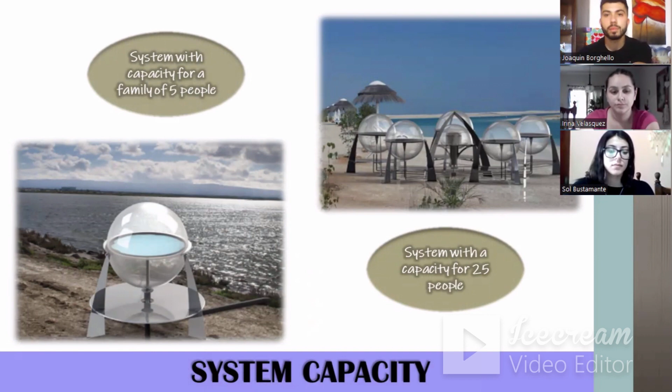In the second place, the water is stored in containers inside the regulator.

The smallest container has the fluid valve system that controls the overflow of water into the largest containers. From here, by the action of gravity and the pressure work, the water is propelled through a system of pipes towards the sphere. There, it reaches a metal tray, forming a film of water, which will evaporate.

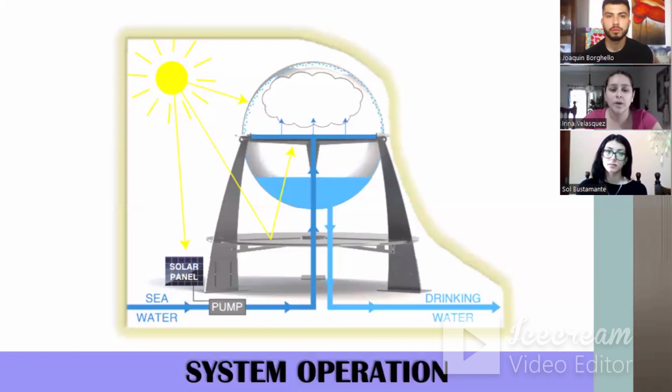Then the water in the sphere begins to evaporate due to its direct contact with the sun's rays, which increase the internal temperature of the sphere. The water vapor condenses on the inner walls of the sphere and by means of gravity, it accumulates at the bottom of the sphere. In this way, the high internal temperature, which is produced by the action of the sun reflected on a plate under the sphere, eliminates germs and bacteria from the stored water. Finally, by means of a pipe and faucet, the water can be withdrawn directly for consumption.

I will present the HELIO system components. The system is made up of the regulator module and the sphere where the distillation takes place. Both parts are connected by means of a pipe system. Now, Joaquín and Sol are going to describe these components.

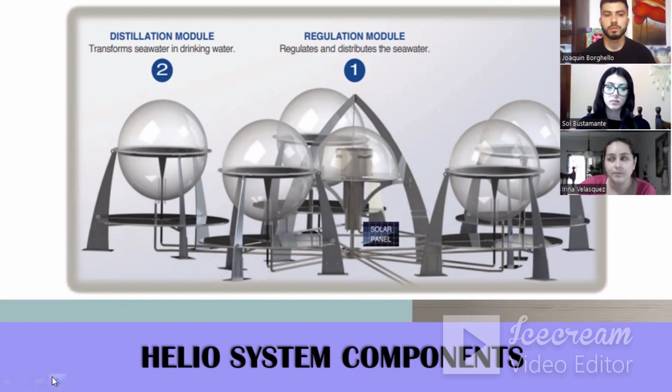The regulator module is the central part of the system, in charge of regulating and distributing the contaminated water. The semi-sphere-shaped plastic module is supported by a removable aluminum structure. Inside it, there are 2 containers of the same material. The smallest container is the one that receives the contaminated water from the pump and has the fluid valve.

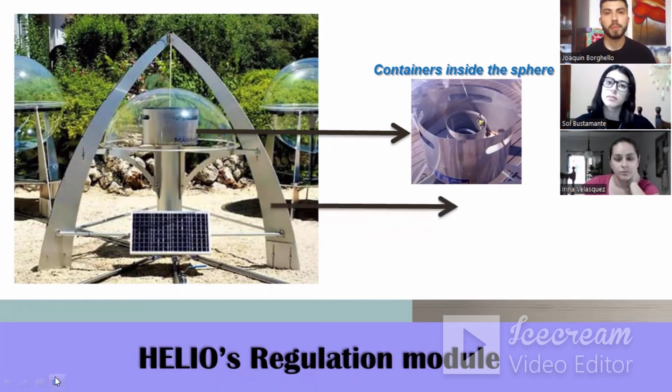And the largest container is the one that, due to overflow, is filled and distributes the contaminated water through a plastic pipe system. Finally, the aforementioned pump works with a small solar panel of about 0.25 square meters.

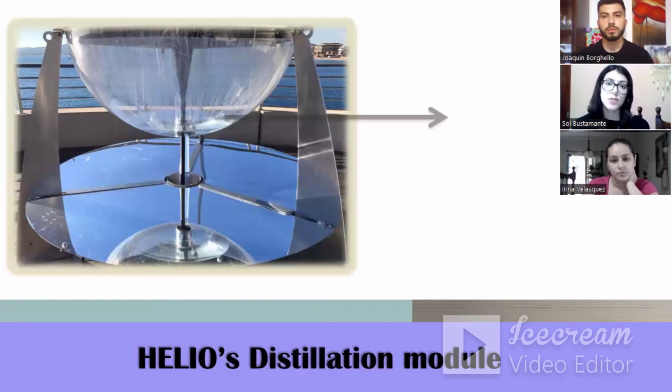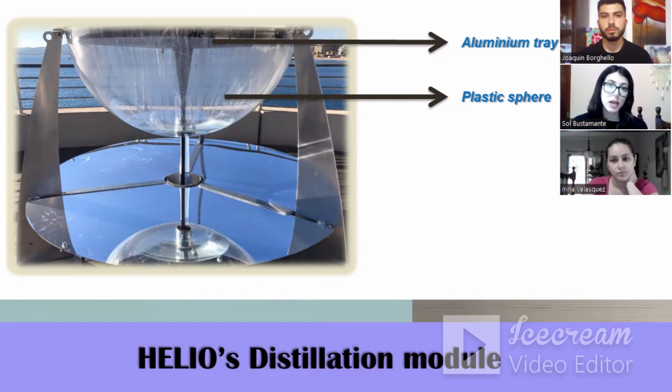The distillation spheres are plastic spheres with a surface area of 1 square meter. Inside, they contain an aluminum tray connected to a pipe that comes from the regulator module and allows the film of water to fall on the surface of the tray. Under the sphere, there is a polished stainless steel plate which is similar to a mirror that allows the reflection of sunlight and then the reverberation.

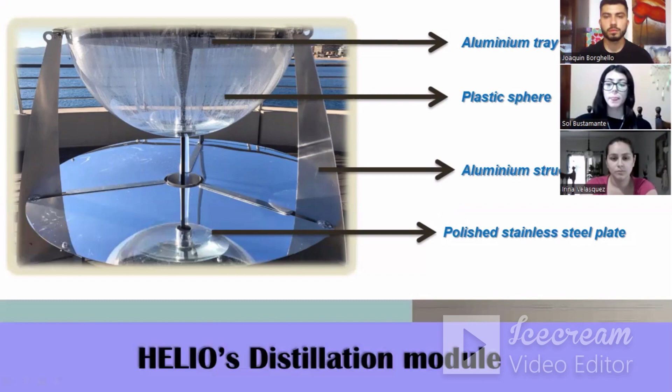Now, I will present similar water purification projects. As the scarcity of drinking water is a global problem, it is well known that there are various possibilities to reduce it. In this section, other alternatives in development will be presented. The first project is vapor condensation with a daytime radiative cooler. This project was developed by a team with a small vapor condenser based on the biological system of the darkling beetle found in the Namib Desert in southwestern Africa.

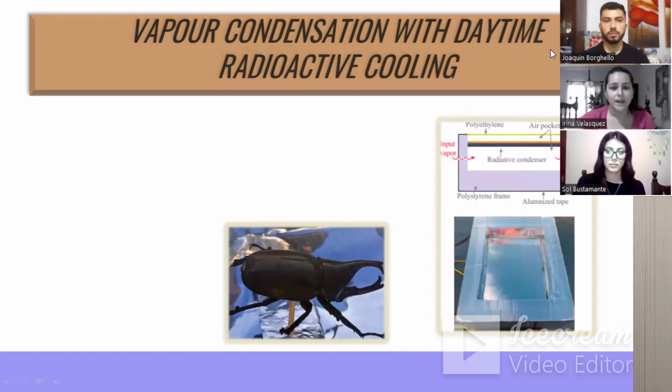Using a thin film of material called polydimethylsiloxane. This material is very efficient in releasing thermal radiation in the atmospheric transparency window and is therefore placed on silver to reflect sunlight. This combination makes the condenser cool below the dew point for condensation. The radiative condenser is thought to be in thermal contact with the cold reservoir in the upper atmosphere and outer space, with the cooling power condensing water during the day without the need for an external power supply. To clarify, the system produces its own clean water without contaminated water.

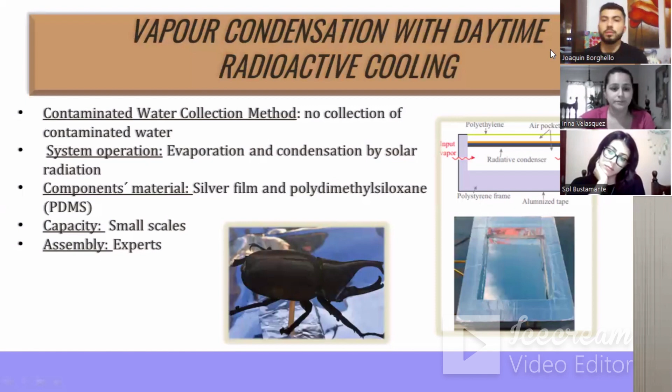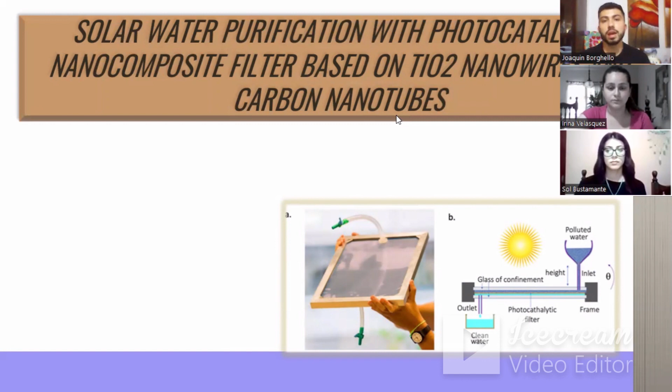The second project is about solar water purification with a photocatalytic nanocomposite filter based on titanium dioxide nanowires and carbon nanotubes. This project addresses access to clean and safe drinking water in electricity-poor regions, where advanced water purification methods are absent. In those places, it has been shown that titanium dioxide nanowire filters, assisted only with sunlight, can efficiently decontaminate the water by producing reactive oxygen species.

Also, interweaving this filter with carbon nanotubes offers an additional water decontamination channel, which is pasteurization. These filters can intercept various types of microbial pathogens, including bacteria and large viruses. So it also contributes to an efficient removal of a lot of organic compounds and infected microbes. The device has a very simple configuration.

The contaminated water is stored in a tank, then passes through a multi-layered filter material, and the pathogens are trapped on the filter surface, while the UV component of the sunlight produces reactive oxygen species, and thus provides decontamination. And finally, the carbon nanotubes absorb a broad range of the solar radiation, which heats up the filter material and thus provides pasteurization.

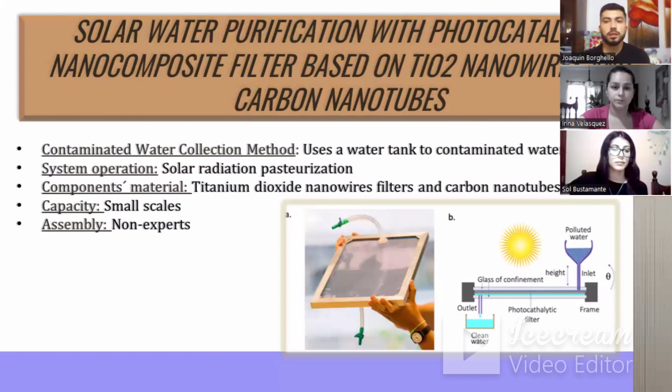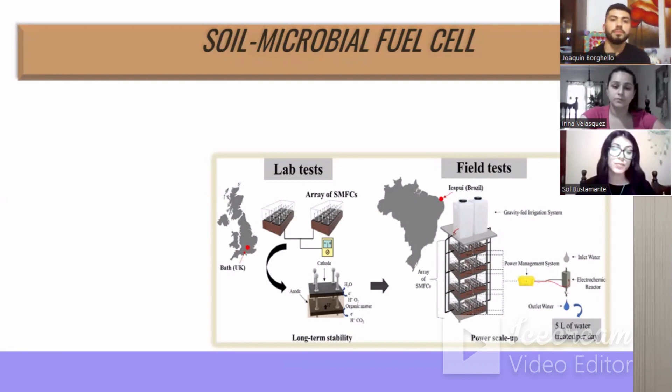The third project is soil microbial fuel cells. The soil is naturally rich in microorganisms, and this allows it to harvest its own energy, which is why some microorganisms have the ability to transfer electrons through their cell membranes to conductive materials, such as electrodes, which results in the generation of electricity.

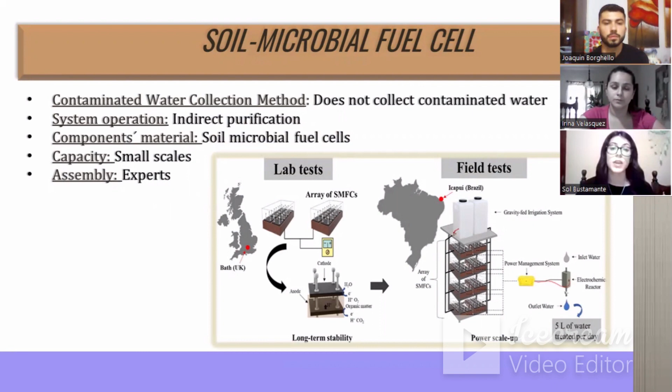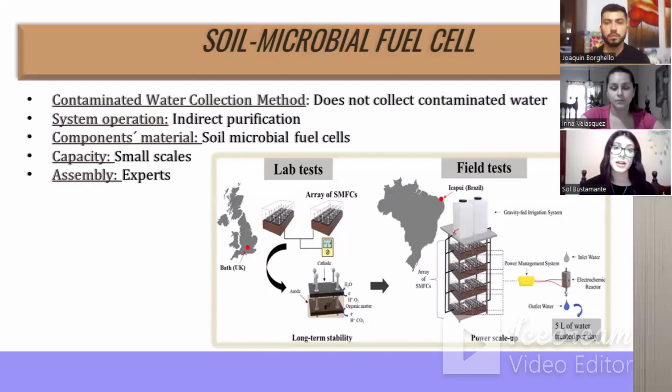The microbes that emit electrons, known as exoelectrogens, consume the organic compounds to generate charged particles. These electrons are transferred to the anode and travel to the cathode via the external circuit, producing electricity.

Now, I will present the comparison of the different systems proposed in order to demonstrate the advantage of the HELIO system in terms of water collection, system operation, component material, capacity, and assembly. It will be compared with the different projects previously presented. We do this through a comparative table.

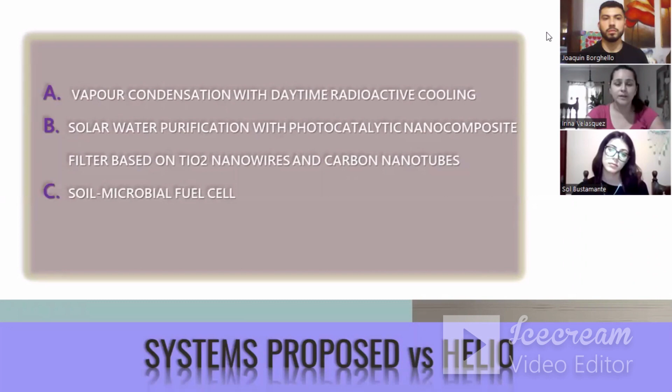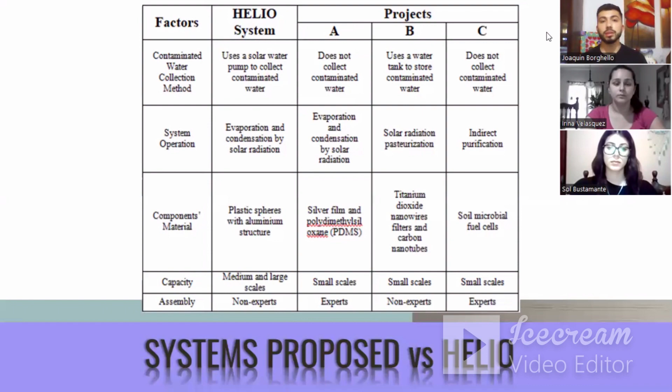Well, in conclusion, this work delves into one of the most urgent problems worldwide, which is the lack of drinking water. Although there is a large amount of water, its use is limited. There are places that have the capacity to purify contaminated water but do not have the source, and others where they have the resources but do not have the economic capacity required to make the water drinkable. The lack of these necessary resources leads to different diseases and adverse conditions for the correct development of life, mainly during childhood.

Based on a comparison made with different systems, the HELIO system is proposed as the best alternative to address the lack of clean water, without much infrastructure required. This system does not consume conventional energy and is sustained by solar energy, producing approximately a total of 10 liters per day, designed for a family of 5 people. However, a series installation can be built that results in increased liters of purified water per day.